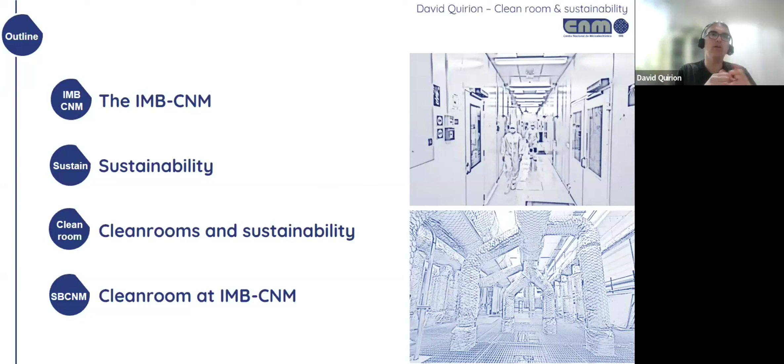So the outline of my talk: I will first introduce our institute here in Barcelona, the Institute of Microelectronics. Then I will give a very short introduction to sustainability, just to place the frame. And then I will explain the relationship between clean rooms and sustainability, especially explaining what clean rooms are and what it implies.

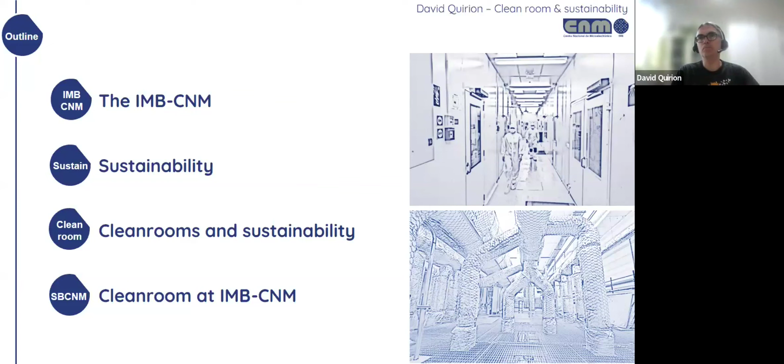And at the end, I will show you what we did in our clean room here in terms of sustainability. So let's start. The Institute of Microelectronics of Barcelona is located at the outskirts of Barcelona, on the campus of the Autonomous University of Barcelona. We are devoted to nano and micro technologies, and our main laboratory is a clean room.

You can read here our mission. We are really an R&D research center, because we do research, but also development, going from really basic research to products—and this thanks to the clean room.

To achieve these goals, we are organized in 3 thematic axes and 1 technology unit. So those 3 axes—I forgot to bring a pointer, sorry, there's no pointer, but okay—the 3 thematic axes are health and environment, physics frontiers, and civil security, energy and mobility, which is the one most related to sustainability.

As our director said, we develop solutions to reduce the environmental impact of third parties—that's really the goal. These are the 3 thematic axes, and the technology unit, which is the link between the research and the clean room, is dedicated to developing the technologies, because here we really have the technology.

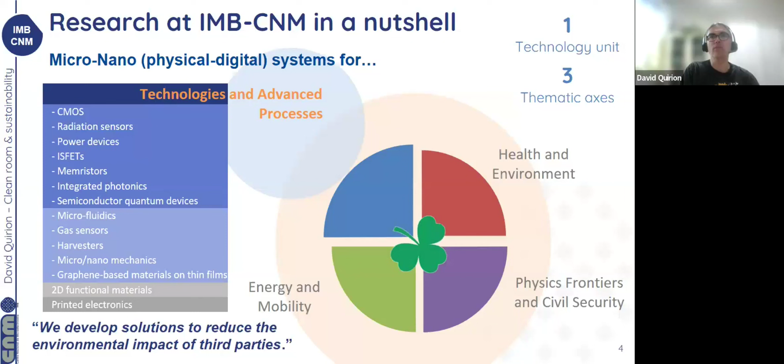We also study or investigate more advanced topics like 2D functional materials or printed electronics. This gives us a wide range of applications, and here you have, in a nutshell, everything we do. We can fabricate devices to investigate physical properties of cells—small chips which will be put into the cells to study the properties during the life cycle.

We can also fabricate neural probes, sweat patches in paper. We were an essential infrastructure during the COVID pandemic, and we developed some COVID test platforms. We develop smart power modules, and also devices in silicon, for example for CERN in Geneva to study the ultimate elementary particles, but also silicon carbide diodes for space missions. So we have such a wide range of devices we fabricate here in the clean room, from the cells to the sun. This is very fascinating to work in this environment.

And all this is possible thanks to the clean room. So the clean room facility, which is here, you can see it in the picture, and its associated laboratories. The clean room is 1,500 square meters, with the service zone to achieve the ambient conditions we need for the clean room, and we have a smaller clean room for packaging.

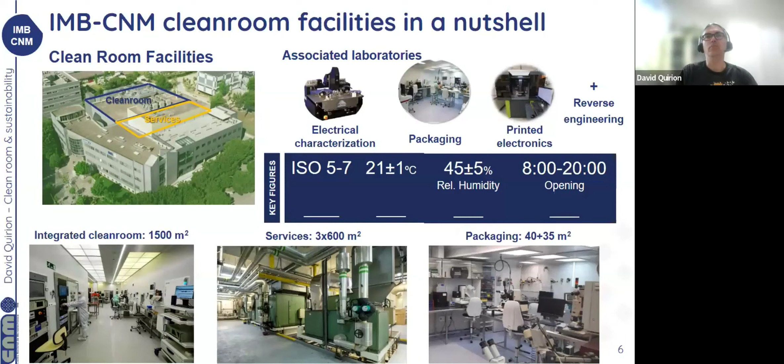So the clean room, in very short terms, is an ISO 5-7. I will explain what it means, and with temperature all year of 21 degrees and 45 relative humidity. And we work in 2 shifts, from 8 to 8.

But we are not alone, obviously. We are in various networks. First of all, the Spanish network of clean rooms, which is Micronanofab, with the ISOM in Madrid and the NTC in Valencia. We are also part of the EuroNanoLab infrastructures, with more than 14 clean rooms all over Europe. And we are also part of the NFFA activity.

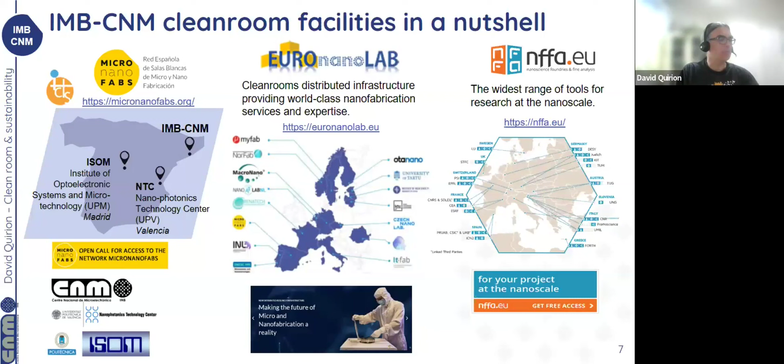Just to propose some services. So again, more numbers about our clean rooms. We have more than 150 tools. We are a staff of 45 people, which includes associated laboratories, maintenance, people in process. So the people really performing process are around 20-25 people in the clean room, divided in 13 process areas. You have the list here.

And for the year 2023, we made more than 12,000 single steps, which are organized in runs, what we call runs, which is the step sequence to fabricate a device, more than 1,000 of them. And we process more than 4,000 wafers. This is what we would call fabrication we do on our own.

But also we have external access, so people, researchers, students can come and work in our clean room. So we had almost more than 1,800 external accesses, single accesses, for a total of more than 3,600 hours.

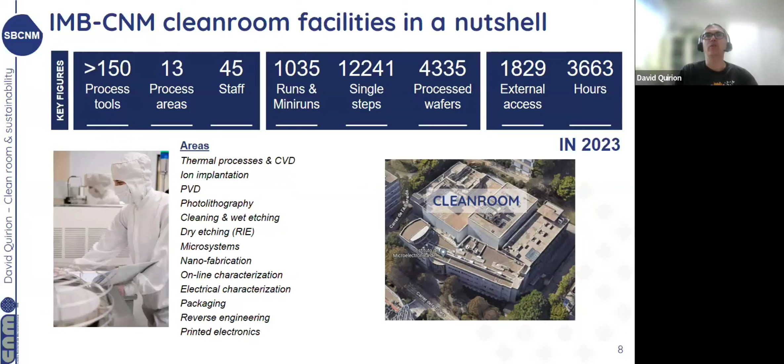So, these are the typical numbers we give, but maybe today I want to focus on different numbers. The numbers I want to talk about today, which are related, you have just 2 of them here: our electricity consumption, which is 6 gigawatt hours per year, equivalent to a small Spanish city of 5,000 inhabitants. And we have a water consumption of more than 4,500 cubic meters per year, which, well, is not that much in this case. It's equivalent to 80 people in Spain.

But the first number maybe is the one which makes my point, or the title of my talk. Is this really sustainable, if a mid-sized research clean room consumes so much electricity? So that raises the question of the sustainability of such an infrastructure.

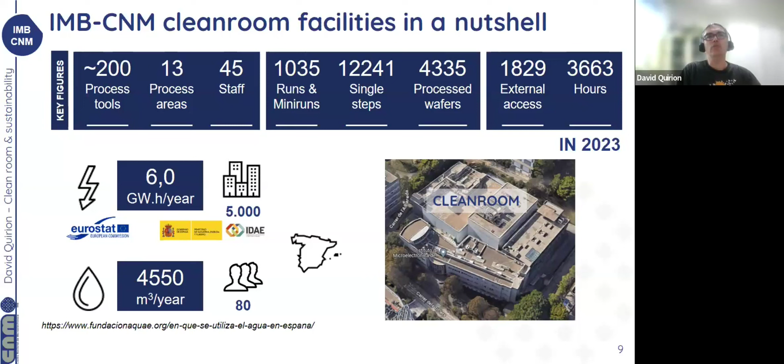So now that we are talking about sustainability, let me introduce you to sustainability. There are two definitions, well, there are several. The first one I like is from the German philosopher Hans Jonas, which I just read: act so that the effects of your action are compatible with the permanence of genuine human life. And the second one, which is maybe the most famous, is from the Brundtland Report from the United Nations in 1987, which is about sustainable development: a development that meets the needs of the present without compromising the ability of future generations to meet their needs.

So sustainability is obviously up to date. We talk a lot about it, even if you can see from those quotes that the topic has already been there for more than 50 years. The awareness is nothing new, prevalent in all of society, but still, you can see it, for example, the United Nations launched the Sustainable Development Goals. In Spain, we have the Spanish Circular Spain 2030 to promote the circular economy and Spanish industry. More close to us is the Tenerife Declaration from September last year, on the global dimension and sustainability of research infrastructures, and even closer to us, in the CSIC and in our institute, we have sustainability committees.

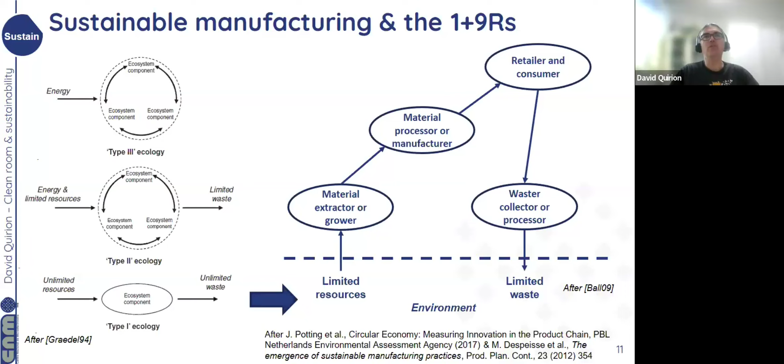Okay, so to understand it better, let me extend this sequence. Basically what we do when we make any manufacturing is we start with some resources, natural resources, oil, gas, whatever, or metals, and from this we extract materials, make something of it. From those materials we fabricate a product which is sold and used by the consumer, by people, and then we generate waste as limited as possible.

So, just to explain the way to a more circular economy, Potting in 2017 proposed the concept of the 9 R's. I call it the 1+9 because the first one we do is just to manage the waste, that's something we are really used to. So now we will go from the less circular to the more circular, from low circularity, which has higher numbers, to high circularity with lower numbers.

So the first thing we could do, and we already do, is to recover. That means from this waste, to burn it and generate energy from it, just to be able to extract or fabricate again a new product. This is still not very circular, obviously. So more circular is to try to recycle that waste and make basic materials to fabricate new products.

To go further, we can take those products we just throw out, and we can take parts of it and build a new product, which is to repurpose, or we can try to remanufacture them. Remanufacture is we use it for the same goal, repurpose is for a different goal.

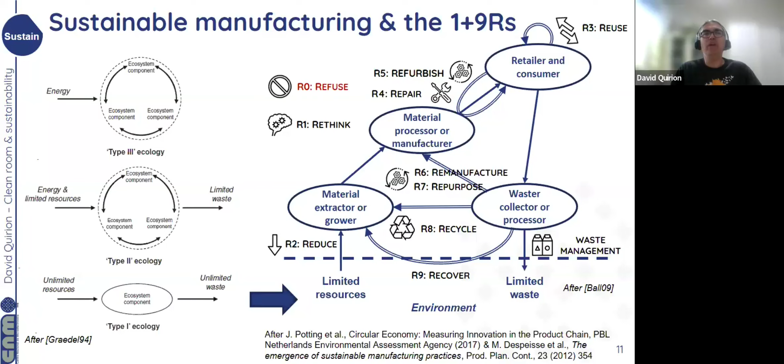Now, so I was starting about clean rooms, so I explained what sustainability is. So what is a clean room? Just to make things clear, take the ISO standard's definition: a clean room is a room within which the number concentration of airborne particles is controlled and classified, and which is designed, constructed, and operated in a manner to control the introduction, generation, and retention of particles inside the room. Well done. So how does it work? Here is a scheme of a clean room.

So we take air from the outside. It is filtered several times, with several filters, 3, 4, 5, depending. The humidity of the air is reduced or added, depending on the humidity of the external atmosphere, and the temperature is controlled to the condition needed inside.

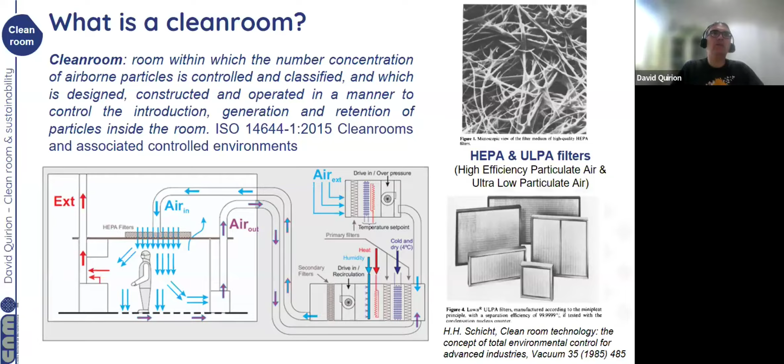One of the key elements for a clean room are the HEPA or ULPA filters, which means high efficiency particulate air, or ultra low particulate air, which are the filters on the ceiling of the clean room. The final filters have efficiency high above 99%. Maybe to understand why clean rooms exist, where do they come from? A short history is nice.

I mean, the first concept of clean working is given by a historian about the Waltham Watch Company in Massachusetts, United States of America, where they tried to fabricate watches in the workplace in Roxbury, but they were not able to because of the dust coming from the street. You can imagine it was not paved, so people, horses, and so on moving around, and it makes production impossible. So they decided to move to Waltham, which was a very rural zone, and there was no dust, and they saw the yield improved a lot.

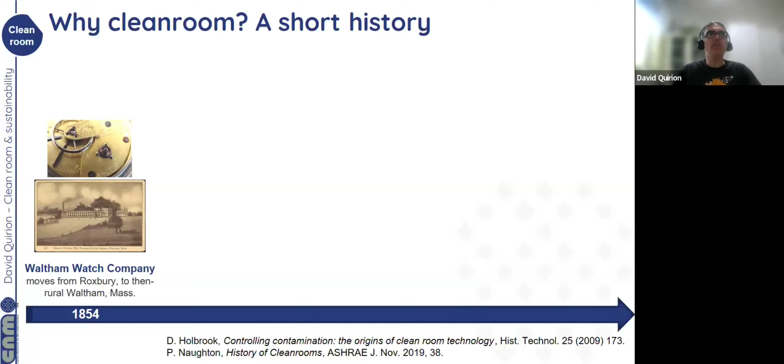Well, the example is from the mid-19th century, and is American because basically the historians, you have the two quotes here, are American. So maybe the story could be told in Europe, maybe from Switzerland, high in the mountains, where we can make very nice Swiss watches. But still there was already preoccupation with this.

And as with much of the technology in the 20th century, World War II was key. So maybe the first example we have is from the Norden bomb sight. The bomb sight is a system, you have a photo here, just to target a place where you want to launch a bomb. The Norden bomb sight system was a system for the US Air Force. It was used on Nagasaki and Hiroshima in 1945.

And for this, they needed very small ball bearings. So they asked a company, Miniature Precision Bearings, MPB, and they discovered that dust was very key. So they started to think, and over almost 20 years, because the first order was just the beginning of World War II, they ended up with the concept of white rooms. So people in France or in Spain will understand where our words white room come from. But it was based mainly on cleaning a lot, not on avoiding dust, but mainly cleaning.

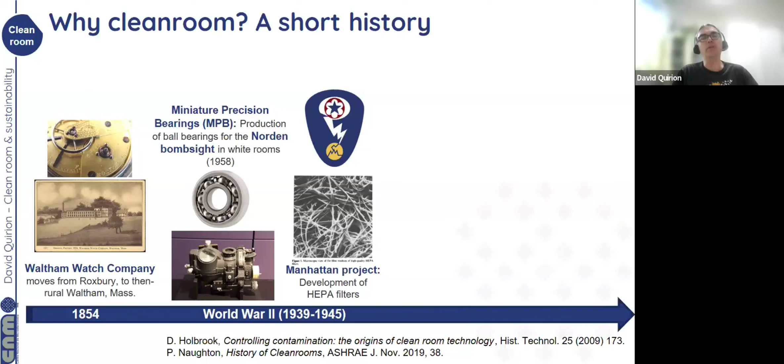Also key was the Manhattan Project, for which the HEPA filters were developed, even if the technology came from the German gas masks from the First World War. And this was to protect the workers from the particulate, the radioactive particulate generated in some parts of the buildings.

And the first clean room for production was actually done by AT&T for vacuum tubes for the transatlantic phone cable. As you can imagine, when you put a cable below the ocean, you need very high reliability. They needed it to be there for more than 20 years without any defect. So also the clean conditions were very key.

But who introduced the modern concept of clean room is Willis Whitfield at the Sandia National Laboratory. He introduced two very key concepts: unidirectional ventilation, which is sometimes called equivocally laminar flow, which is not laminar because some local turbulence is accepted, and the self-cleaning room. That means that most of the work before, the cleanliness was obtained just by cleaning. But now you have a room which, because of the airflow, is able to maintain itself more or less clean. Well, you still have to clean, but much less. So it's a self-cleaning concept.

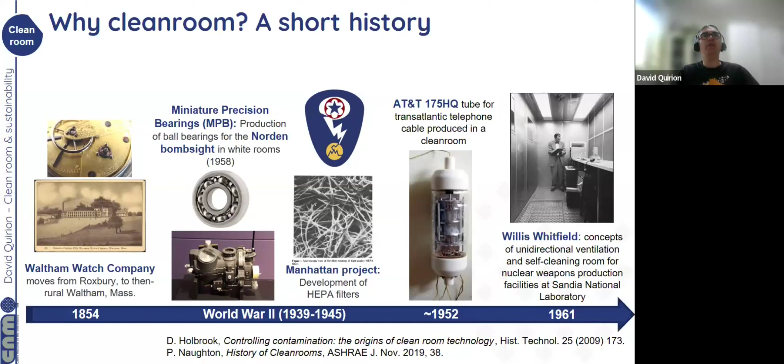And what I want to say here is that clean rooms are really important for the 20th century, which is a century of miniaturization. Miniaturization means that we need very precise manufacturing and very precise tools. Just to say, there's a very close parallel story in medicine, which can be told, but if you read those two very nice articles, you will see it much clearer.

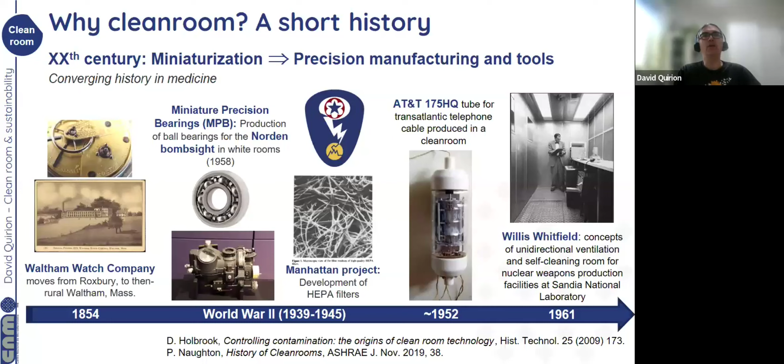So obviously we have clean rooms because we fabricate very small devices. That's what I said, miniaturization, which is one of the keys of the technology in the 20th century. Here on the left-hand side, you have a human hair compared to a transistor from the 90s. Our transistors today are very much smaller. So imagine the disaster when any dust comes on it and you cannot fabricate it.

Just to give you some numbers, where do those particles come from? Well, they obviously come from outside. In the room where you are sitting right now, you may have more than millions of particles per cubic meter. Small particles, half a micron, which is one of the standards to measure it. But also anything generates particles: equipment, machinery, processes. And obviously, as humans, as living organisms, we generate dust particles from the skin.

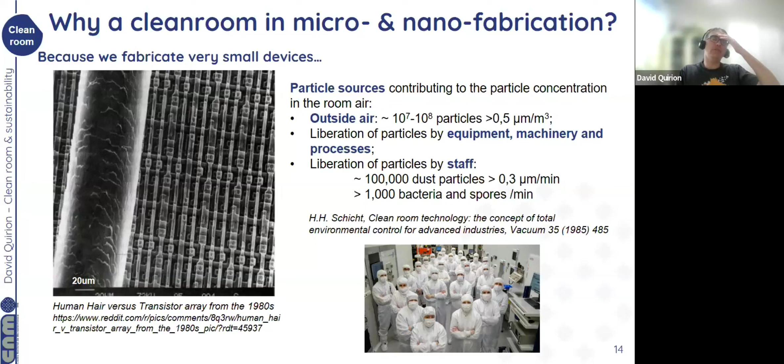You can see the numbers here: 100,000 dust particles per minute, and also bacteria and whatever. So just after conceiving the first clean rooms, it became obvious that we need some standards. We have to be able to say how clean a clean room is. So that was a goal. There's a long story of standards, but the final one we have now is the ISO 14644. I used it to give you the definition of a clean room before.

It divides the quality of the air depending on the maximum allowable concentration of particles of certain size per cubic meter. And so you have different classes, ISO 1 to 8. Now it's metric. It's based on the number of 0.1 micron particles. So for ISO 1, you should have less than 10 0.1 micron particles per cubic meter. But people like me, who have been in the business for a longer time, are much more used to the first definition, when everything was measured in cubic feet, and knowing the conversion value here. So ISO 3, we used to say it's class 1. It means that you have less than one particle of 0.5 microns per cubic foot.

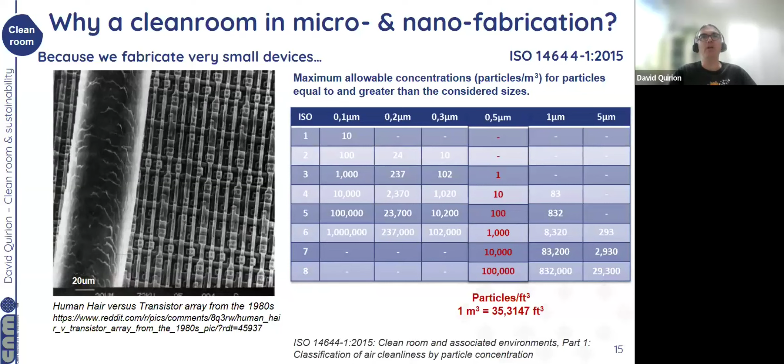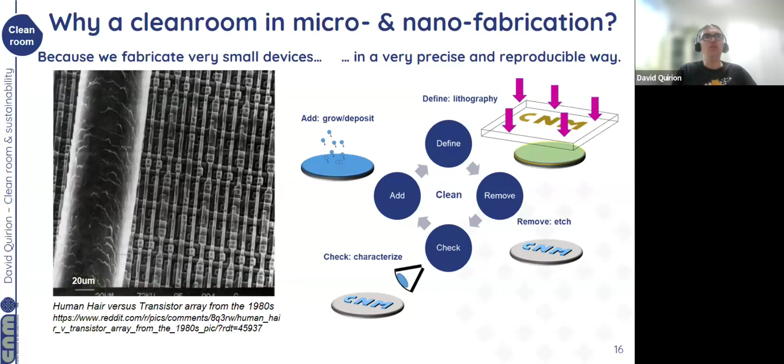And what do we do in those clean rooms? In our case, because we are in a micro-nanofabrication facility, we fabricate devices. And to do this, you have this typical cycle of microfabrication. We add some material, we deposit it, we define exactly the patterns we want to have with photolithography. Then we etch, and then we check and so on, and you do it 1 time, 10 times, 100 times, and you end up with the device you want. So in two words, we have risk of contamination, and obviously to make very small patterns, we need precision tools and products: chemicals, resist, and so on.

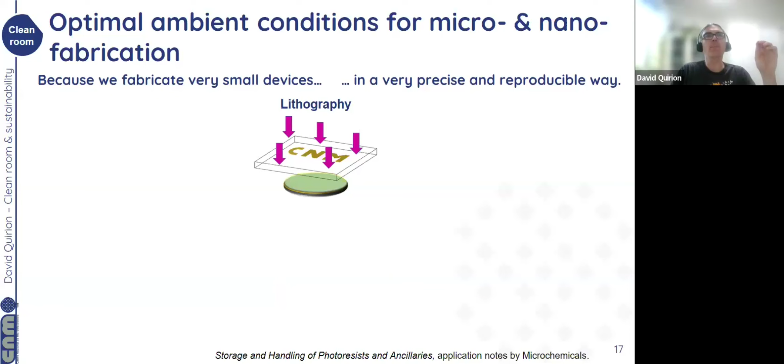And more precisely, which conditions do we need as a clean room? Most of it is defined by the lithography. Temperature should be between 18 degrees and 23 degrees, with variation of 1 or 2 degrees. High temperature reduces the viscosity of the resist and could affect the resist film thickness. It also affects the rehydration of the positive resist, and this could affect the development time and resist profile. So if you want repeatability, you really need to control the temperature,

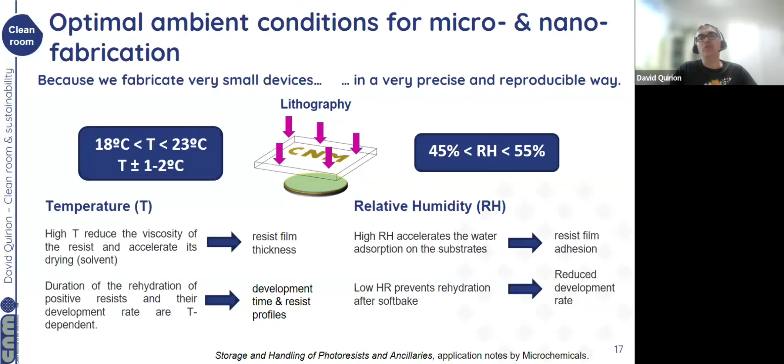but you also need to control the relative humidity, between 45 and 55%. Because if you have higher humidity, there will be a layer of water on the wafer surface, and it will affect the resist adhesion. And if we have too low humidity, it prevents the rehydration after soft bake and reduces the development time and rate and so on. So you really have to control both. So those are the conditions we need.

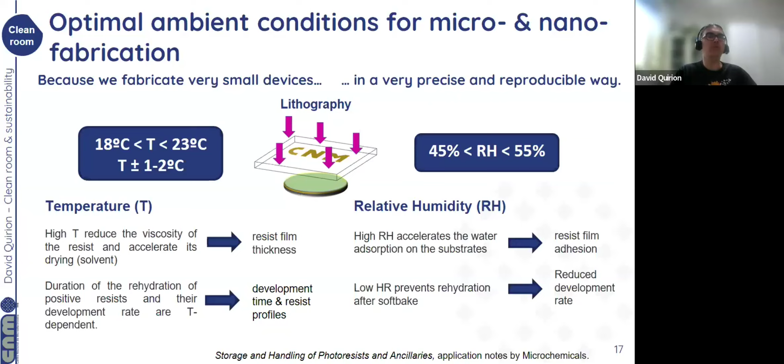But what does it imply? As I just explained, we need a very advanced heating, ventilation, and air conditioning system to achieve those conditions. And this needs a lot of electricity, obviously. So maybe the best example to get an idea of what it means is to go to the semiconductor industry and take numbers from an up-to-date fab in Taiwan, TSMC or equivalent, working on 300 millimeter wafers. They consume 400 gigawatt hours per year, which is equivalent to a Spanish city of more than 300,000 people.

Power consumption wise, it depends a lot on the facility, but let's say very briefly that the tools use more or less 50% of the electricity, because they're working 24 hours a day, which is very different from here, obviously. And the facility, which means the heating, ventilation, and air conditioning systems, uses the other half. There are different papers; I just quote one here to give you the repartition of the electricity use.

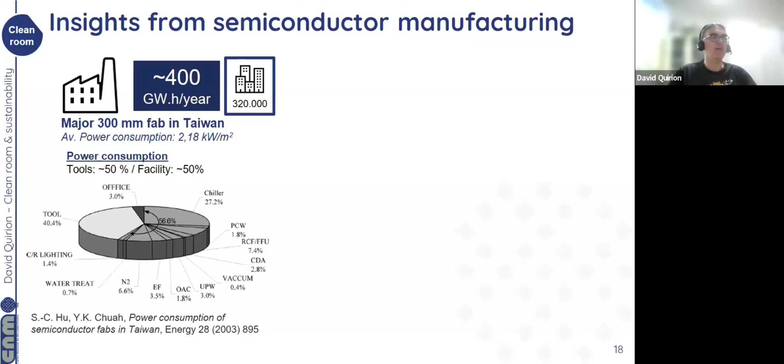But that's not the end of the story. I told you that we also need chemicals, metals, and so on. So you have this very nice paper from Williams in 2002, which said that to fabricate a microchip with a weight of 2 grams, what you really need is 1.7 kilograms of materials, fossil fuel mainly, but also chemicals.

And well, it's summarized in this sentence. So the environmental weight of semiconductors far exceeds their small size. This intensity of use is orders of magnitude larger than that of traditional goods. Could be discussed or not, but I think it really summarizes the issue well.

There's electricity, there's also all the products. So we really definitely have here an activity which is very intensive in energy, water, and materials. We don't have the use of water here, but it's also much exceeding. In our case, it's not that much as you saw before, but for a semiconductor manufacturer fab, it's huge. But that's not the end.

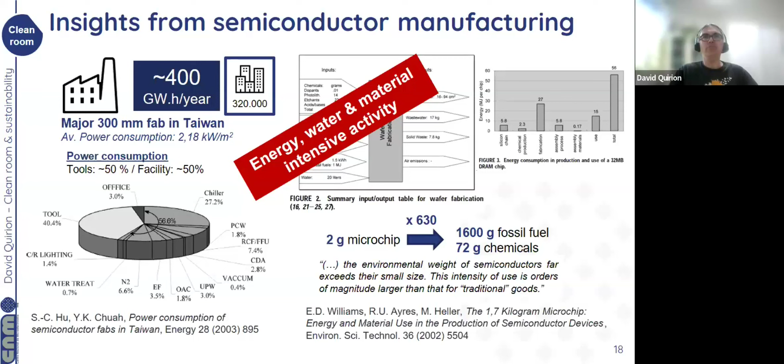Let's have a look at research labs. You have this initiative in France, Labos 1point5, which is very interesting, and this paper is still not published, so maybe we have to look at it carefully, but still the point is most of us are really concerned about our trips, our travels, traveling by plane and so on. But that's not the end of the story.

In this paper, they really saw that purchases dominate the carbon footprint of research laboratories. It depends on the activity, obviously. If you're doing humanities, maybe not that much, but in science and technology, purchases dominate. They accounted for more than 50% of the emissions, especially the laboratory instruments, and you can imagine in a clean room. Wow, it definitely has an impact. So we need a strategy in purchasing also, to think about the whole picture.

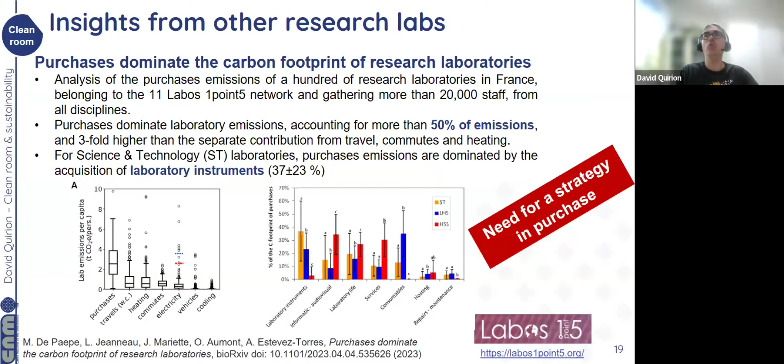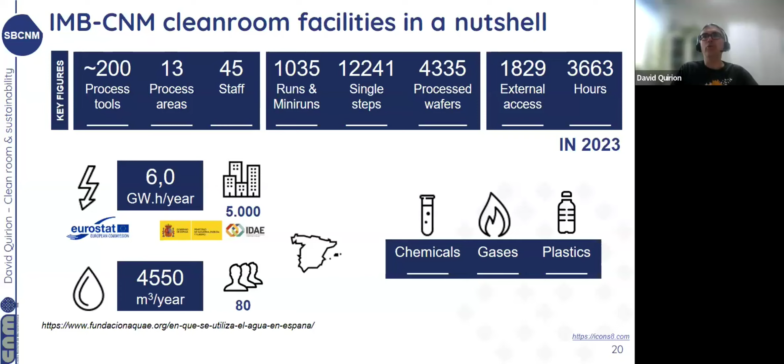So coming back to the numbers of the clean room, we still have the typical activity numbers, the electricity consumption and water consumption, but I will also now try to focus on the chemicals, the gases, the plastics, everything we can imagine. So going into details now, what we did here in our clean room in terms of sustainability. Most important one, let's start with electricity consumption.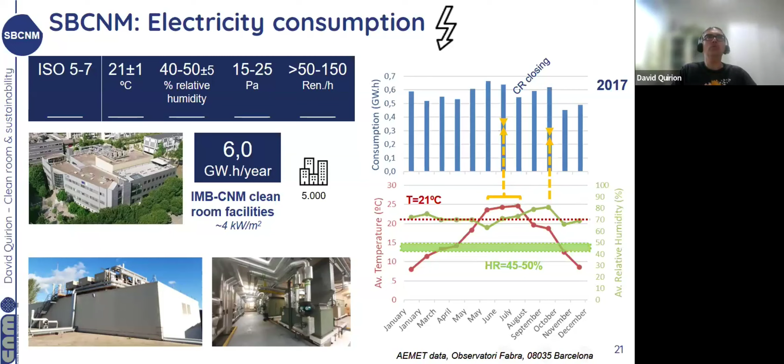But what did we do to minimize or at least control the electricity consumption here? That's an activity we started more than 10 years ago, because first the clean room, which was built in 1991, was extended from 1,000 square meters to 1,500 square meters in 2009. So this induced an increase, obviously, of around 36% of electricity consumption.

And so just after that, seeing that the electricity consumption was too high, we took a first action in 2011. We decided to reduce the conditions during the night, and in the weekend we are not working, so we don't really need to maintain exactly the humidity, and we can relax the temperature slightly. This induced a saving of around 20%. In 2019, we installed some variable speed drives, which help us control the velocity of the air fans during the day and the night, and this induced again a saving of around 13%.

And so we are now consuming in a 1,500 square meter clean room as much as when the clean room was only 1,000 square meters. Okay. We may extend soon with the CHIPS Act. That's still to be seen, but we have to take more actions, obviously, to maintain the electricity consumption, which ideally would stay as it is now.

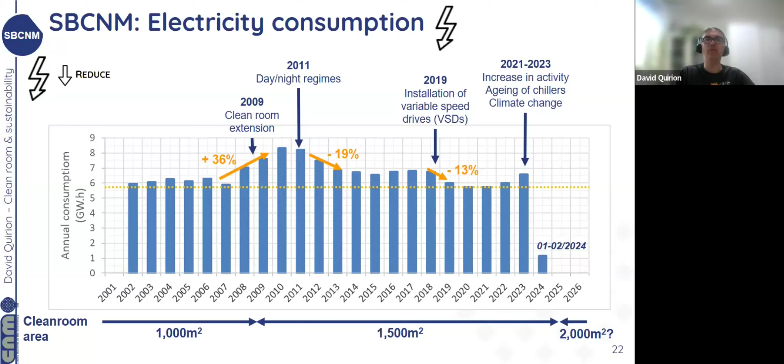But you can see that in 2023 we consume a little more electricity, and this is definitely due to an increase in activity. We have a lot more work now, which is good news. But the chillers are aging, and climate change is also affecting us, because here in Barcelona the temperatures are higher than, let's say, only 5 years before, at least for 2023.

So we didn't stay inactive for this. The government in Spain asked us in March last year for an energy report, and they really defined what we could do and what savings are expected.

Definitely what we should do is replace the 3 cooling machines, the chillers, upgrade our air conditioners, and install some heat recovery units. That's the 2 actions we have to do, which could help us save around 20% of consumption.

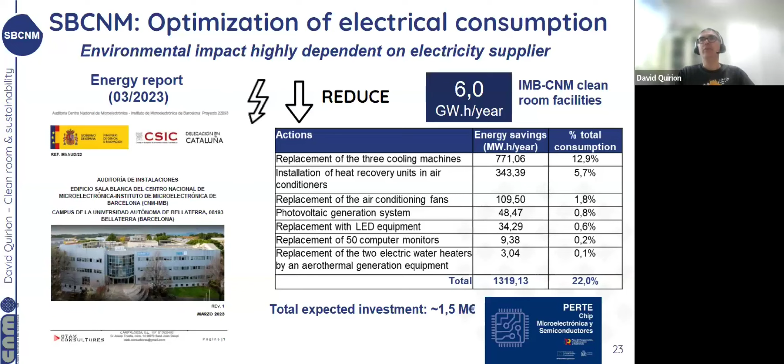This represents quite a huge investment, between 1 and 2 million euros, but with the CHIP Act, or the Spanish CHIP Act, the PERTE money, we decided not to buy less tools but to focus on the infrastructures and invest money here because it's key.

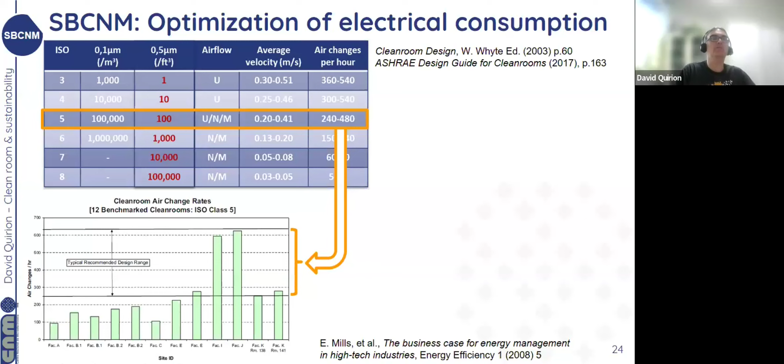They saw that, looking at many ISO 5 clean rooms, they needed less air changes per hour than is normally recommended in typical tables you find in most textbooks, which is a surprise, because that means those clean rooms are able to be ISO 5 while consuming much less electricity, which is something everybody should look at and think about.

Some advice: if you have to build a new clean room, you have to include efficiency in the design, but do not oversize your clean room. That's obvious, but each clean room is unique, so you need a system analysis. You have to think about it, and maybe you can consume less, for example by diminishing the air changes per hour a lot, while still having good air quality and improving efficiency. That's the point of this article, and you can read it.

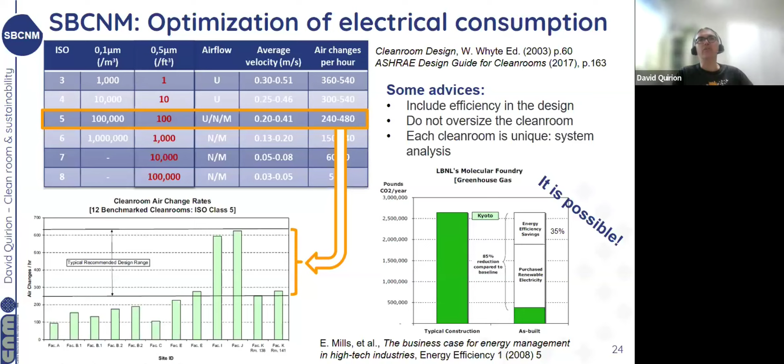And it's possible - obviously, you already see we did it here. We were able, by adding day and night regimes and so on, to decrease electricity consumption. They also managed it here at the Molecular Foundry in Berkeley - they were able to save 35% of electricity just by applying those kinds of things I just explained, and by changing electricity suppliers they were able to finally reduce CO2 emissions by 85%. So we can really do it.

So next, the water consumption. Maybe I'll try to go a little faster. We don't consume that much here, but why not? Because we have three sources using water in our clean rooms - the chiller and the process cooling water - but those are closed circuits, so it's no big issue.

Where we use water and have a lot of loss is for the ultra pure water, or DI water, mainly due to osmosis. We already reuse part of this water for the humidifiers of the air conditioners, and for the toilets also. But still, we want to do better.

Next, in the future, we'll try to recover part of the water used in the rinser and dryer and more. We had a very critical drought here in Catalonia, which seems to be ending, but still we have to use as little water as possible - that's our social responsibility.

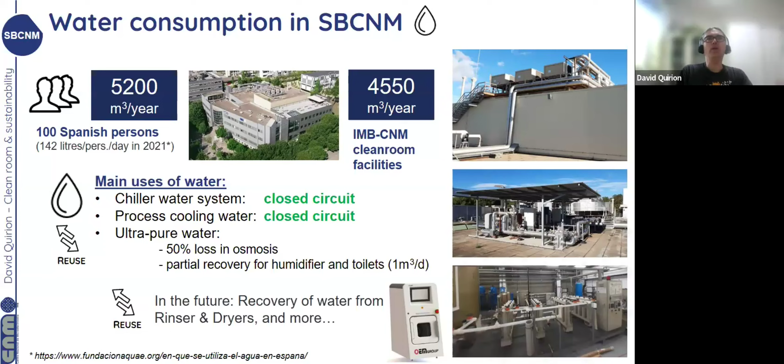But okay, I told you there's not only electricity and water, so let's look at all the other elements which have environmental impact - the gases. We use around 20 gases every day here for reactive ion etching, for CVDs, for furnaces and so on. First, very important: all those gases and chemical products are very high purity, so they are very energy intensive to produce due to purification. It's a lot - that's the first point.

Second, what do we do with those gases? We install scrubber systems for gas abatement just to avoid sending toxic elements into the atmosphere. We still miss the abatement system for fluorinated gases - we should include it in future investments.

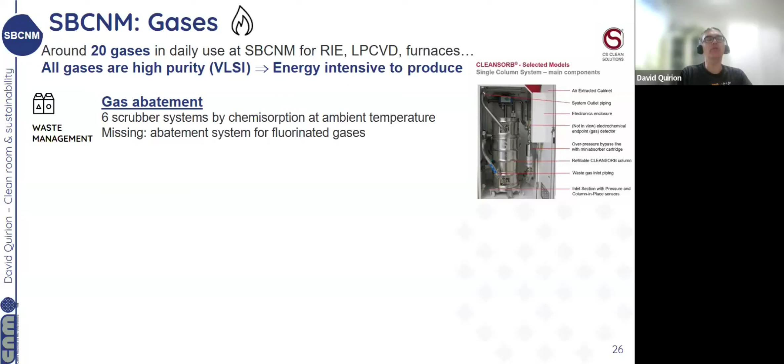But just focusing on maybe the most famous one, the semiconductor industry and all our micro and nanofabrication processes are really dependent on greenhouse gases. You have a typical list here, and they are used mainly in dry etching and CVD and so on. The compound with the highest global warming potential is sulfur hexafluoride, SF6, with a factor of 24,000.

So what can we do? Well, to be honest, it's very hard. I think as a research institute, we should try to contribute to this. The microtechnology industry has been trying for years and years, and they've improved a lot. I'll just quote one of the latest, using a gas mix of difluoride, argon, and nitrogen to substitute carbon tetrafluoride for CVD chamber cleaning. But still, there's a lot of work to be done here.

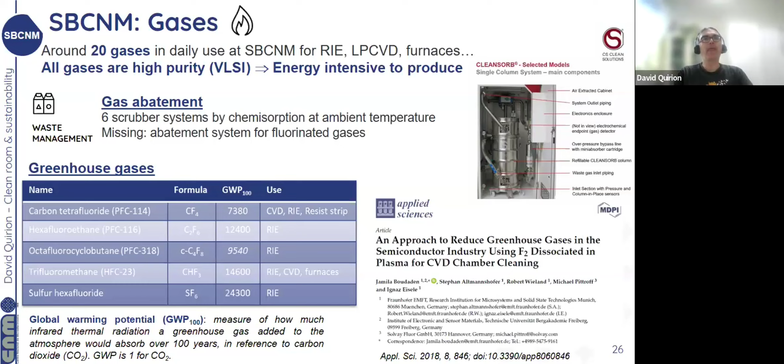Chemical products: what I said about the gases is true here too. They are high purity, so they're very energy intensive to produce. So we definitely have to reduce their use, or use exactly what we need. Here in our cleanroom, we have more than 50 different chemical products in use, and we can have in our warehouse more than 3,000 liters of chemical products. We also use a lot of resins and developer for photolithography.

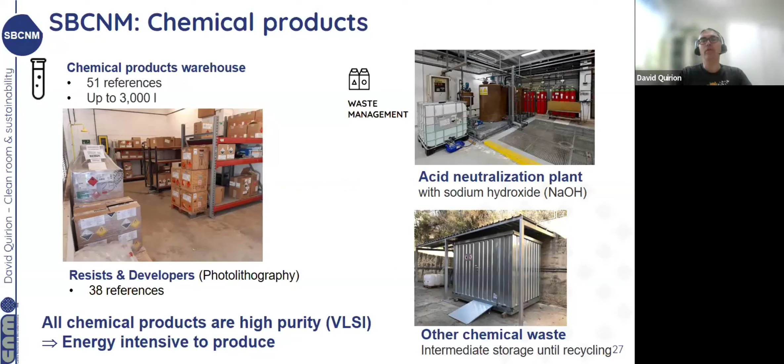What do we do? Well, we have an acid neutralization plant here at our facility, and for all the other chemical waste, we have intermediate storage until recycling. But maybe there are other ways.

Here you have two papers trying to substitute resins for more environmentally friendly compounds, like silk for EBL, e-beam lithography, or for deep UV, in one case a collaboration with a French group, based on chitosan. Now about cleanings and etching, let's start with some important points.

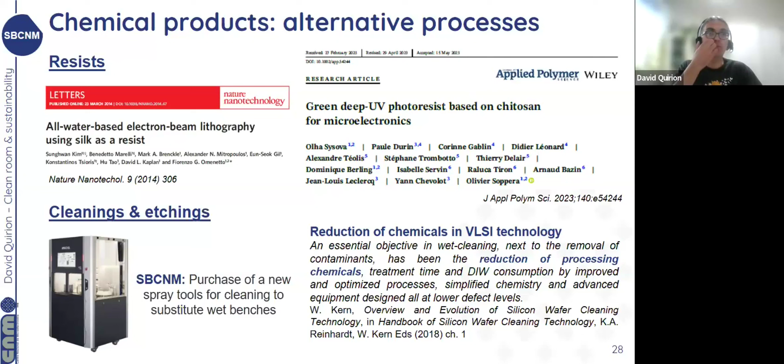The semiconductor and microelectronic industry has for years reduced the concentration of processing chemicals, to reduce cost and environmental impact. In our case, we decided to mainly use wet benches with 5 or 10 liters each, so anytime you need to do a cleaning, you need, for example, 5 liters of piranha solution. We optimize and use it as much as possible, and we're trying to purchase new spray tools.

We purchased it, and we are still waiting to switch from wet benches to spray. We generate a lot of waste. When you go into detail, it's huge amounts from chemical bottles, gloves, face masks, and all the filters for the air conditioning system, which we change every 3 months, 6 months, or up to 7 years, depending on the filter type. So lots of them.

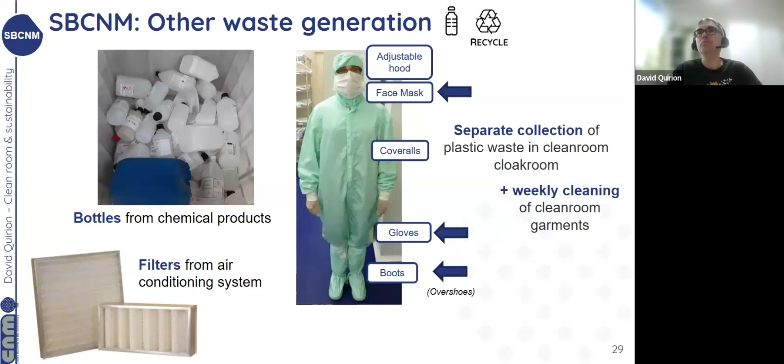We have very strong waste management. For years we've had a manual for waste management in the center, and depending on the type of waste, we have different recycling streams. I think this is common practice, but it's worth mentioning because at every stage we should do it.

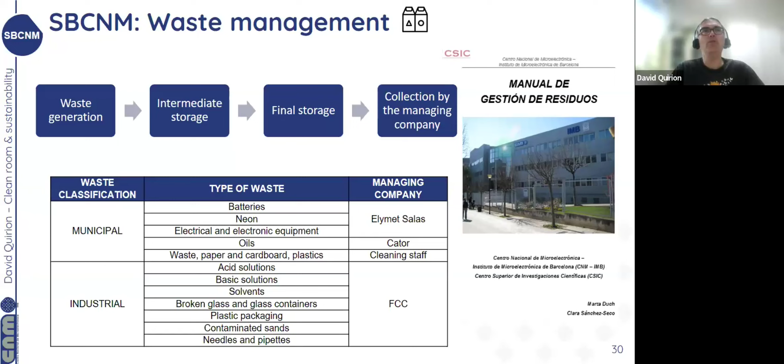What we are doing now, which is maybe key for sustainability, is to make a real flow analysis of our activity. We have a master's thesis ongoing by Guillermo Zito, studying our metabolism and life cycle assessment of our cleanroom. He analyzed everything which comes in, electricity, water, gases, materials, metals, chemicals, gloves, face masks, and so on, and looked at what goes out, obviously we produce devices, but also plastic waste, emissions, and so on.

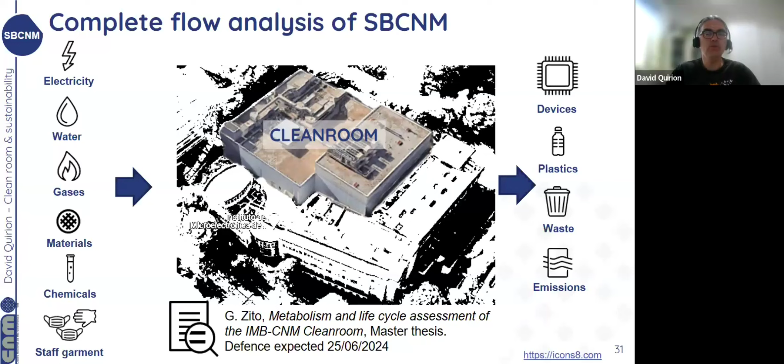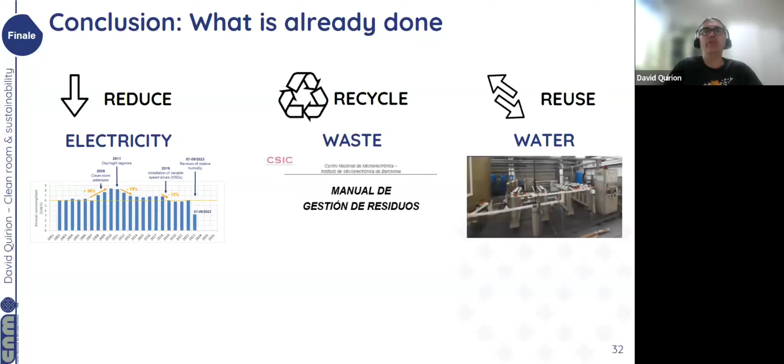And this will be the basis for us to go further. So to conclude, what we already did: I explained that we already use electricity efficiently, we recycle our waste, we reuse water, mainly from the osmosis of the DI water system, and we manage waste with the chemicals and gases. We have a neutralization plant, scrubbers, and so on.

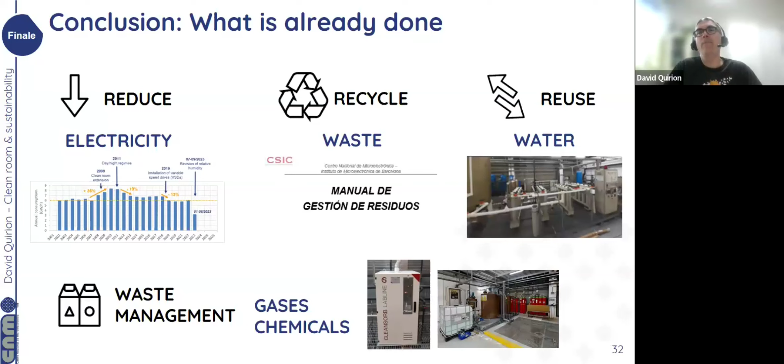What we'll do in the short term is try to reduce, which is more circular, as we saw before, the hours of wet bench use, by getting new spray tools, and also to reduce electricity. We'll make a major investment to replace the chillers and upgrade the air conditioning systems.

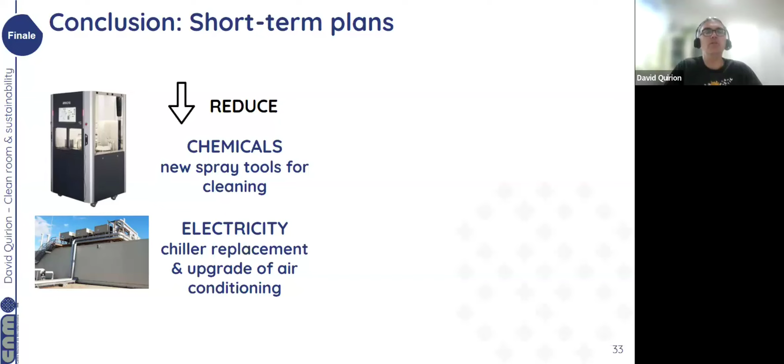But very, very important is a master thesis being done by Guillermo now, on the flow analysis of our cleanroom, which will be a guide for us for the next actions, giving us a full picture. With this, it will be a very important tool for us to decide.

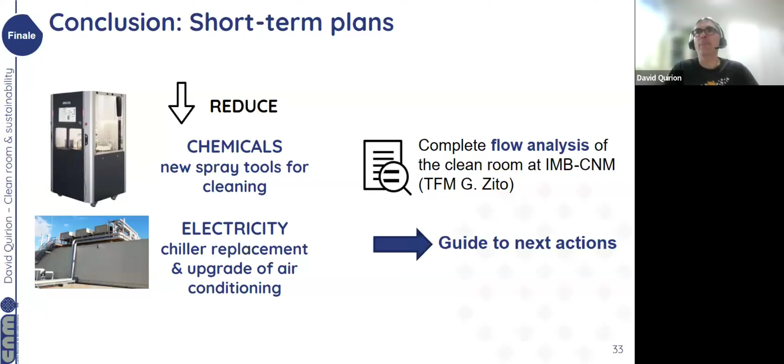So, really to conclude everything: we have a cleanroom, we do science and technology and precision manufacturing in it, and we have an environmental impact with electricity, water, gases, everything we use.

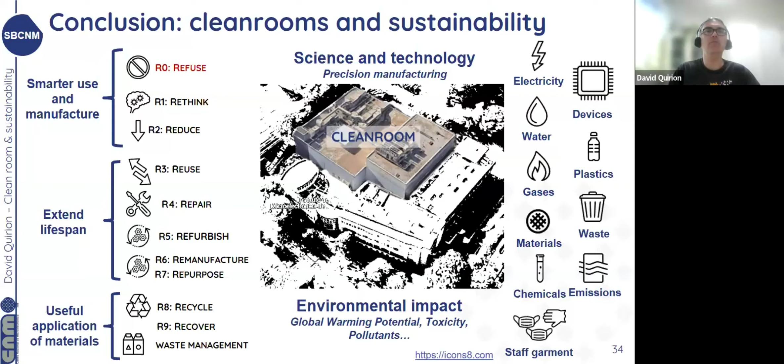And we have some guides here with the 9 R's. Really, what we can do now is try to combine everything in this very complex equation and try to make the minimal environmental impact.

And really, as a conclusion, my word is obviously: cleanrooms are and will always be intensive in natural resources. So don't call your cleanroom green or sustainable, because it is not.

But definitely, as we explained in the brief history of cleanrooms, they are key for the miniaturization and precision manufacturing of the 20th century, and obviously of the time to come, if you believe in the technology.

So we, as citizens, as civil servants, have to make the optimum use of the cleanroom capabilities, and ask researchers to perform the best and most useful science and technology inside.

As Harry Lehmann said, presenting Factor X in a comic recommending circular economy, we are in an excellent position to make the global sustainability transition a reality, as we have all the technological means we need to do so, and cleanrooms may be part of it.

The only question is a social one: are we using them to build a sustainable future based on well-being or well-having? That's the question. So that's all I wanted to tell you.

Just let me introduce the next talk, on June the 5th, by Marek Gresak, I hope I pronounced his name well, on AI, synthesis and characterization of plasmonic nanocrystals.

And I would like to thank everybody, the cleanroom staff, the direction here, and the personnel at the Institute of Microelectronics Barcelona, because they really welcomed this activity on sustainability we started one year ago, and everybody is pushing in the right direction, I hope.